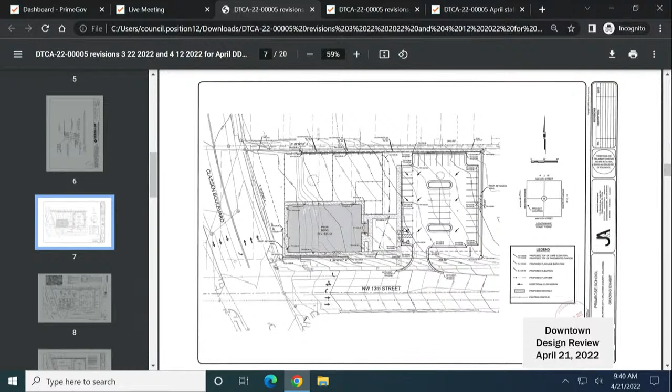The second thing to discuss is the street-facing facades with minimal glass and windows — specifically the south facade and the west facade. They added windows, and made them taller. Originally, one facade had 7% glass against a 50% guideline, and the other had 9%. They increased the first from 7 to 22%, tripling it, and the second from 9 to 16%, almost doubling it.

They did make an effort, and as discussed in February, there's a storm shelter in the building, so obviously you can't have windows there, plus other design issues and concerns that impact the amount of glass. Overall, they increased the amount of glass by 50% over what we saw in February, and staff feels this will really enhance the appearance of the building. We support the proposed facades.

The next issue is that the building is oriented toward the parking lot. As discussed at your meeting in February, for ease of dropping off and picking up children, they have the main entrance facing east. What they've done is add to the center portion of the building, similar to what they did on the east side — it sticks out and looks like an entrance. They do have doors there, but those lead into individual classrooms. They enhanced the appearance of both facades, especially along Classen Boulevard, since there was nothing like that previously.

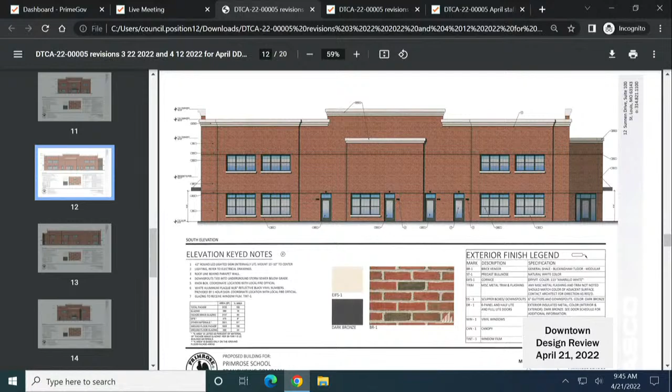The reason why I wanted the opportunity to at least have a couple of conversations is this is an example of exactly what we hope to achieve through this process. I think that the solution accomplished what you were looking to do as an owner, and also it really is a better solution for the site.

And yes, at the very corner it's 6 feet, but it tapers off to 2 feet. So as you approach it from either direction, it's going to be nominal. The retaining walls up on the northeast portion are modest, but they do make sure the neighbors feel like the drainage is such that it's not going to be coming to the north.

I think you did an excellent job listening to what we discussed, and I just appreciate the fact that you made our life a lot easier as we reviewed it.

No, and I appreciate that. I also appreciate that everybody involved—staff, board, neighbors—provided constructive comments that we could address. When I go to meetings where they just say, I don't like it, it's ugly, whatever, what do I do? But when you tell me move trash enclosures, move the building, we can work towards that. So it was a great joint effort, and I appreciate everybody's help.

Any other staff comments? I'd like to echo Tony's sentiments as well. We really appreciate you working with staff and neighbors to the north, addressing all those concerns. I really appreciate it. Sure, thanks.

Okay. Any other thoughts, concerns? Entertain a motion.

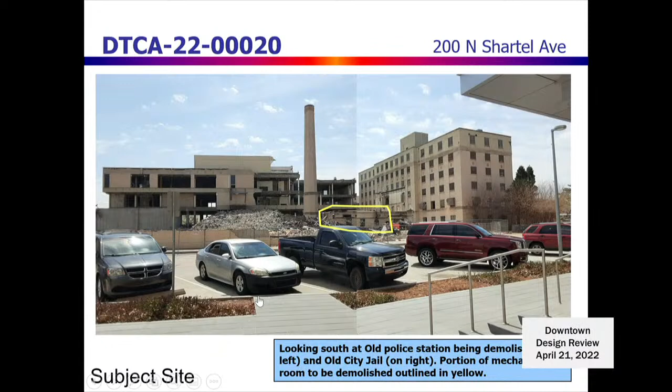So there was a fire that significantly damaged the mechanical room, which is on the back, a 1-story section on the back of the jail. We kind of had to go through the old police station, which is currently being demolished, and they had to stop the demolition because of this. They can't resume the demolition of the old police station until they get this taken care of, because of where it's located.

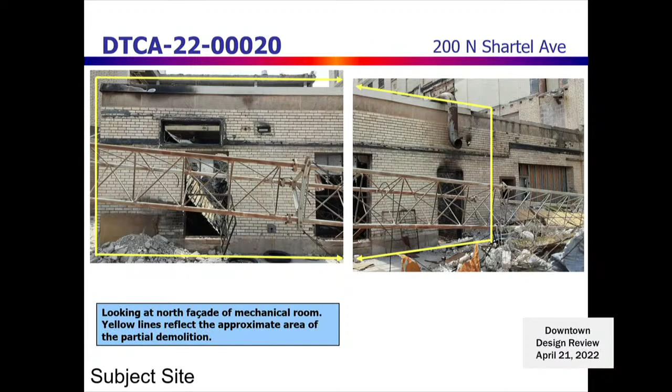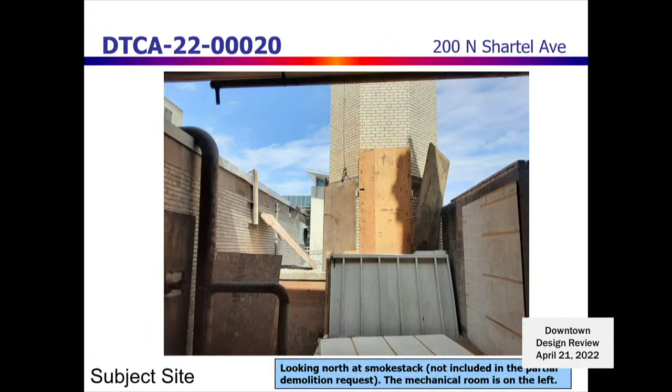So they're proposing to demolish a portion of this, and then put rubble down in the area, so it's about here. From here, that direction, they need to demolish it.

It's kind of hard to even see it unless you get out there in the middle of this demolition site. Let me go back this way. They're needing to demolish this because of everything that's associated with the jail.

We said we really need to go to the committee, because everyone needs to understand what they're asking for. It is so severely damaged. They provided photos which were in the attachment.

If you would like for me to get there, I can ask Katie to share her screen again. They provided photos that they took looking down. I mean, the roof is collapsed. It is a very dangerous situation, and it's kind of beyond even repairable when you look at it.

They also provided a report from an engineering firm that was included with their application. So city staff is here, if you have any questions for them. Staff is recommending approval of this, unfortunately, because I don't see any other option at this point.

Thank you. Any questions for staff? Anyone in the gallery here to speak on that? Okay, any other thoughts or comments?

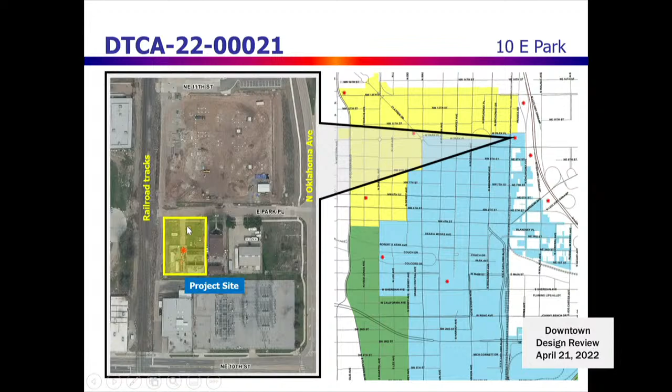Let me get out of this one and get into, where is it, this one. So this is over toward the eastern extent of the Downtown Design District. This is adjacent to one of the crossings that was closed on the railroad, where they closed Park Place at 11th and 12th. The OG&E substation used to be located down here on 10th, and it is now located north of the site, and you'll see some pictures of that.

So it's kind of hard to get a feel for the site, which is why I included this Google Earth photo. The buildings that we're talking about are these two buildings, and they're kind of connected with a wall.

And then there's an apartment building next to it that's not part of this, which has a detached building in the back. I think it's more apartments, which is not part of this.

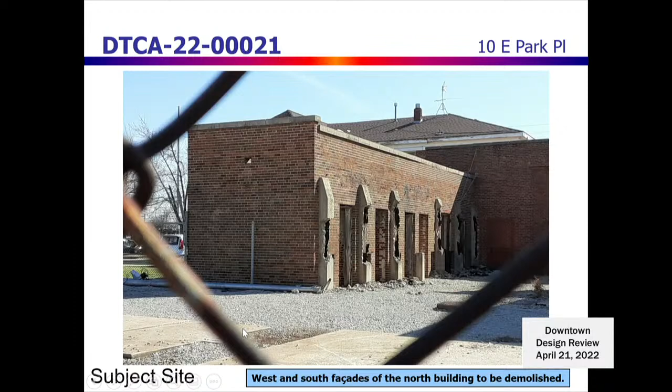The day I went out, I took some pictures through the fence because the site is fenced in. They also included some pictures in their application. And it's kind of a cool brick old building.

It was listed in phase 2 of the intensive level survey as being contributing to a potential industrial district along the railroad track, but there has been no movement on the part of the city or any individual to actually establish that district. That survey was acknowledging the historical significance of some of the buildings.

We had one previously on 7th, you might or might not recall. It was a very small building - Tony was probably the only one on at the time. That one had been damaged by the bombing and was just a one-story building, and they needed to tear it down because structurally it was not sound anymore.

Well, these buildings were originally constructed and used for the substation, but I think they were decommissioned quite some time ago. And so at this time, they're asking that they be torn down.

And so it's a dead-end street now since the railroad crossing has been removed. You have the apartment building next to it, and across the street, as I said, is the new OG&E substation. That property the substation is on is not in the downtown design district.

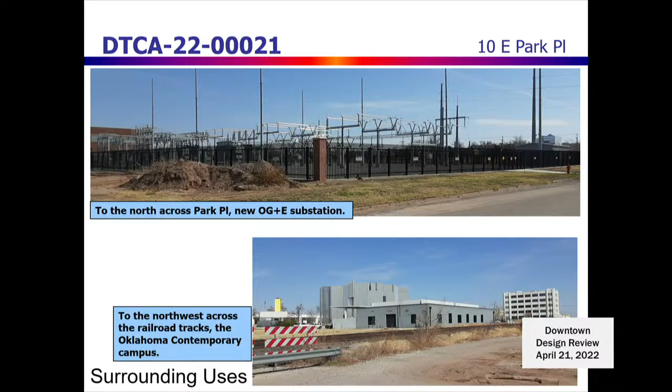So these are just some views from the surrounding area, and then I'll go back to those buildings. So they provided - let me flip past - the guidelines for demo, as you know, are extremely long, and so when we put them in the staff report, it takes up a lot.

So although it showed that this was, as I said, contributing to a potential district, there's been no movement to establish that district at all.

In 2017, OG&E commissioned a structural assessment, which was included. It is not possible to state that the existing facility will remain sound for a certain time frame. It had not been maintained over time. There are a lot of cracks in the brick. It has been sitting there unused for a while.

So you can consider any of the demolition criteria, any of the information they submitted. The buildings are no longer needed for their originally intended purpose, and they're difficult to adapt to another use, especially considering their condition. So for these reasons and issues detailed in the staff report, staff is supportive of the request to demolish the two structures.

And there are representatives here representing OG&E if you have any questions for them. Any questions for staff? Is there any indication of what might go on the site after it's demolished?

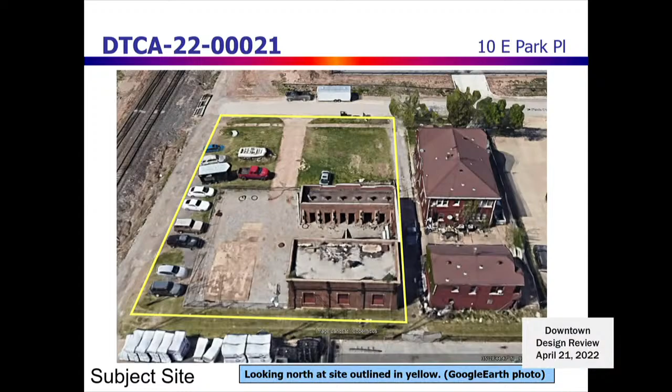Questions, comments? I think one other thing that would be important to know is whether the fence is staying around the perimeter. It is coming down. Okay, thank you - I assumed it was coming down, and I assume all on-site improvements removal would cover that. Thank you.

Okay, anything else, comments? Okay, I'll entertain a motion. Thank you.

I'll make a motion to approve the application on the basis that the project complies with the regulations and guidelines of the Downtown Design District zoning ordinance, as referenced in sections C and D of the staff report, with the condition that the owner works with staff to address whatever the final ground covering is going to be for the property.

I'll second. Was that Rosie Black or Trevino? Kayla? Rosie, okay, thank you. I have a hard time hearing from over here.

Okay, the motion passes. Thank you.

Next item is DTCA-22-00029 at 1111 Classen Drive. Okay, let me get out of this one. I got it over here. I lost it, there it is.

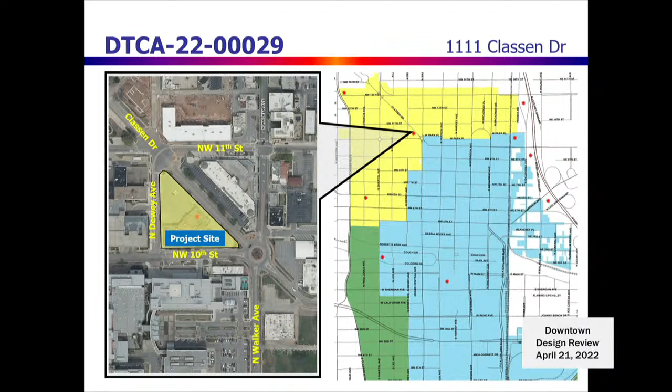So this is what most people know of as the old EMSA site in Midtown. EMSA built the new facility and closed all their other locations, and they all got moved. Some of them, like the one on South Walker, is being offered up again. This one, the proposal is to tear down the building.

When I suggested that the owner could provide information, because I knew they were working on something, we've had meetings, and he submitted the entire set of drawings, which is what you saw in the packet. I just want to remind everybody, we're only talking about the demolition of the existing building. The architect is here, and we have a pared down version of the proposal to show you that doesn't have all the detailed drawings with the dimensions, which right now you don't need to get into that much detail.

So it's a triangular block, which makes it very interesting to try to design a new project for, especially when we have the minimum heights and the maximum setbacks. One of the things staff said was we're excited because the new project will meet the minimum height and the maximum setback. The current building does not.

According to the county, the building was constructed in 1966. Previously, on the 1952 Sanborn maps, it showed two restaurants and two filling stations, and those apparently were torn down when they built this building in the next decade.

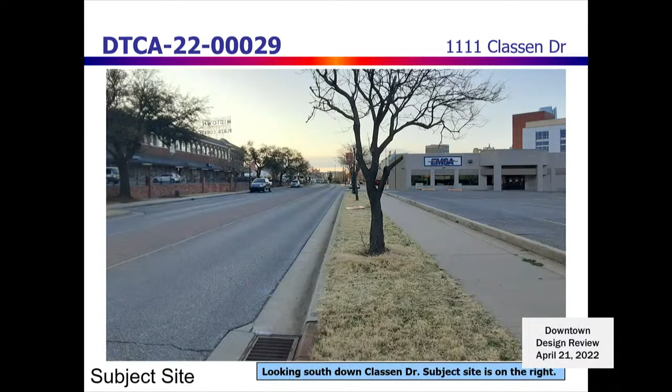So in this area, as you can see, St. Anthony's is in the background. Yes, it's across the street from St. Anthony's. The streetcar goes up the side of it, and you have Plaza Courts across the street. So you have a lot - retail, restaurants, all of that going on. As I said, you have St. Anthony's, and then since Classen goes at an angle, it always throws me for a loop, but I'm going to call this northeast.

You have the new Boulevard building that you have seen more than once because we had to do some issues with signage on it. And across the street, you can catch a glimpse of the townhouse development that has gone up on the Villa Teresa site. So we've got new construction going on, a lot of stuff going on in this part of Midtown.

So let me get back to the building. The building is not listed in the National Register of Historic Places, and in Phase 2 of the intensive level survey, contrary to the last one we talked about that was in that survey, this was not considered eligible. At the time, it said due to age or integrity, but staff does not feel this is a significant building to be concerned about.

And they did submit, as I said, what they're working on, so you kind of have a glimpse into the proposal. The committee can consider any of the stuff we've talked about, and staff is recommending approval of this one.

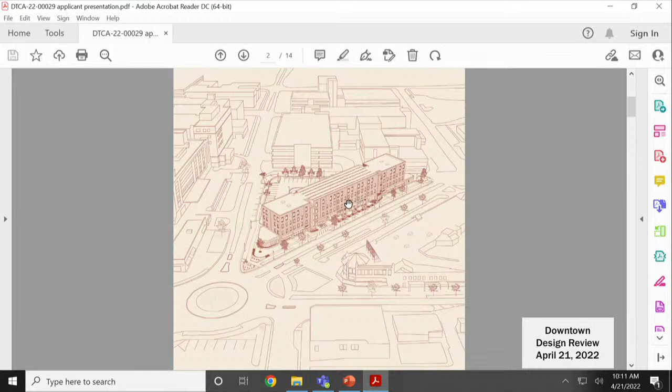You can see from the site plan that we're really utilizing one frontage of the site. Part of the plan here, and this is one of the main points I'd like to make.

We looked at a lot of different options for redevelopment. We've had a lot of questions about why we haven't considered structured parking for the site. The main reason is because it's a triangle. As a Flatiron site, trying to develop structured parking in any way is incredibly difficult. The price per parking spot becomes astronomical compared to what you'd normally see for structured parking. It doesn't make sense, it doesn't pencil.

So in discussions with our client, we felt it actually made more sense to almost capture for the future that portion of the site as surface parking. We see it as leaving a portion open for further redevelopment down the line. We think our client agrees on that.

We're pushing a lot of the typical metrics for Oklahoma City with this project. We're under-parking this quite a bit compared to most of our neighbors, even in Midtown. We're below 1 parking spot per bed. We believe that's not only what a lot of the guidelines push this area towards, but we think it's the intent of the comp plan.

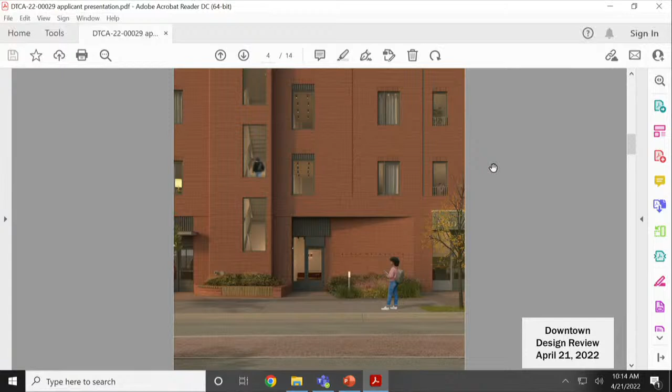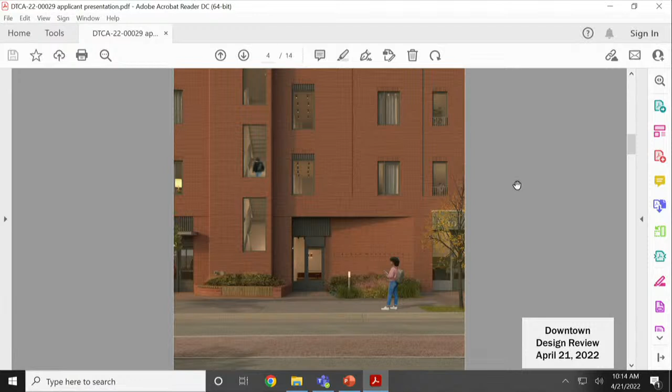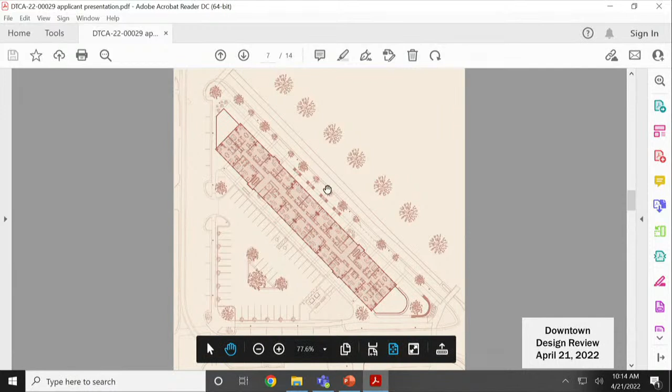So, typical upper floor plan currently. As I said, we've got 60 units divided by 3 stories, that's our typical. All 3 of these stacked, they're exactly the same as you go up.

A typical bedroom plan. We're leaning heavily towards studios and 1-beds, also based on the success of the local market. We feel like that's what people down here want. There's not a ton of families moving into the area. These are mostly young professionals that just want to be down near the energy, and this type of approach to development works good both for the market and for developers.

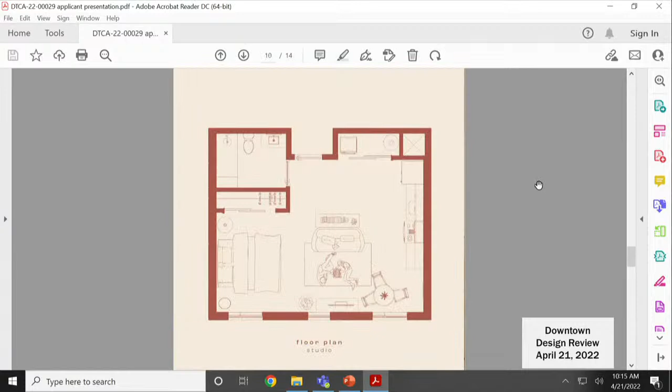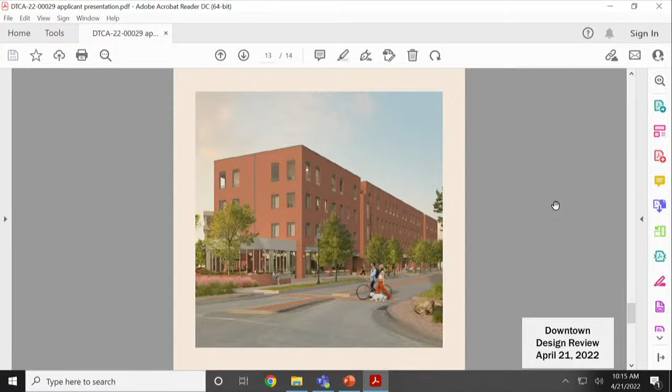And these last two just give a quick overview. As I said, I think you can tell we've put significant energy into this. Something in this vein is what we are doing, this is the direction things are going. I think articulation and design are yet to fully settle, so I'll be excited to come back and present the final design down the road. We're moving on it with a plan to hopefully break ground, if not late this year, then early next year. So that's about our time.

It's generically our timeline, and we're hoping to come back and make you guys happy then. Happy to answer any questions about the design or what's proposed. But again, today we're really just looking for approval to demolish the existing EMSA building so we can continue on our way. And to reiterate, when they submit for the new building, due to the size — your criteria is 20,000 square feet — it will have to come back to you. In addition, even if the building wasn't that large, the parking lot on a corner has a guideline on that, so that would have to come back to you guys. But just so you know, all you're doing today is approving the demolition of the building and all site improvements.

Okay, thank you. Any questions?

I don't want to lengthen this because it is a demo, but the fact that we have this kind of information is what we hope to see whenever demolition requests come before us. So I appreciate you sharing with us. I look forward to seeing it whenever it becomes a building submission, but it makes it easy for us to look at what's there and what the proposal is, so thank you very much.

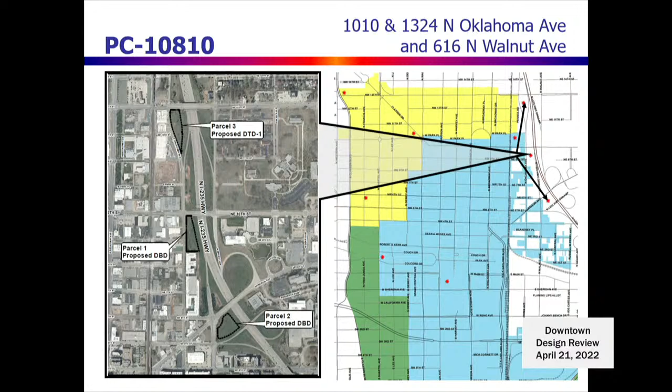Any other questions? So entertaining a recommendation, or making a motion? What we're recommending is that you're entertaining a motion to provide a recommendation of approval to the Planning Commission for the request to rezone, and it's all spelled out. You can just read it straight from there.

Okay, let me pull that back up. I'll make a motion to provide a recommendation of approval to the Planning Commission for the request to rezone from R4 to C3 and C3 to DBD, Downtown Business District, and from R4 to O1, R4 and O1 to DTD1, Downtown Transitional District Limited, on the basis that the project complies with the regulations and guidelines of the Downtown Design District Zoning Ordinance as referenced in section C and D of the staff report.

I'll second. So Blatt, Trujillo. Okay, motion passes. Thank you.

So hopefully soon we're going to start seeing CA applications coming in on projects. That's awesome.

Next on the agenda is item 8, communications. There are 22 items under the administrative approval report. You've been busy there. That's what happens when we go 2 months between meetings. No, the only thing I will point out is there are 3 that are half a page apiece, which are part of the Villa Teresa project.